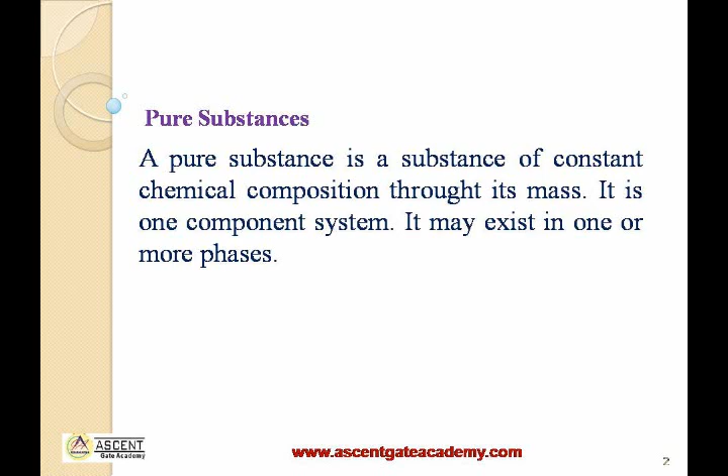Few definitions. Saturation state: a saturation state is a state from where a change of phase may occur without a change of pressure or temperature. Critical temperature: at critical temperature, a liquid completely changes to vapor and vice versa. And above critical temperature, a vapor cannot be liquefied by any amount of pressure. Critical pressure: at critical temperature, the minimum pressure required to transform a vapor to liquid is called critical pressure.

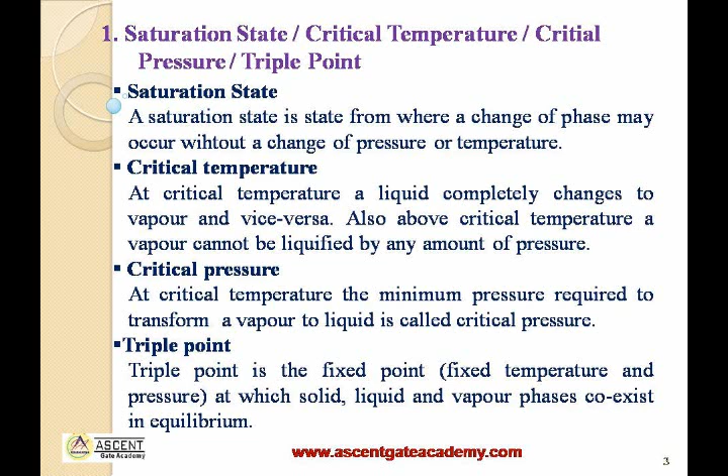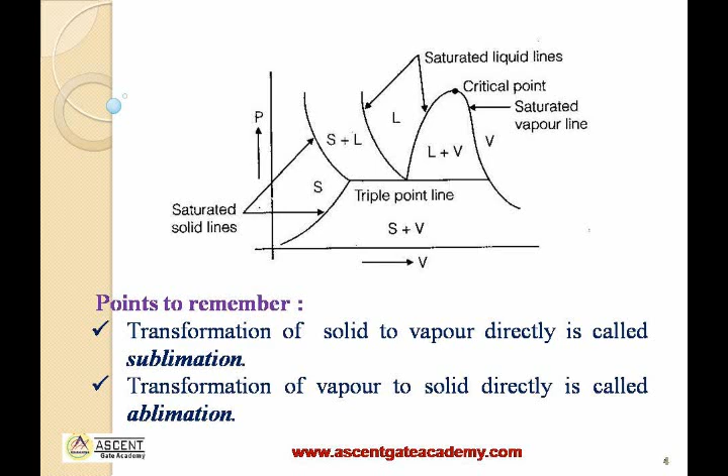Triple point: triple point is the fixed point, or fixed temperature and pressure, at which solid, liquid and vapor phases coexist in equilibrium. Few points to remember. Transformation of solid to vapor directly is called sublimation, and transformation of vapor to solid directly is called ablimation. Degree of subcooling: saturation temperature minus actual temperature. Degree of superheating: actual temperature minus saturation temperature.

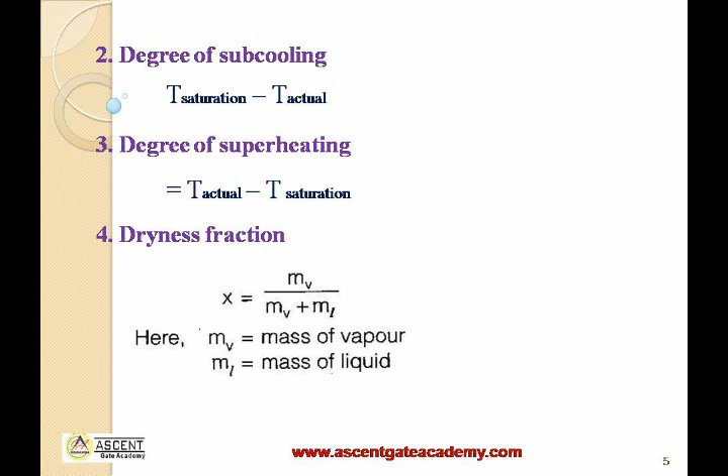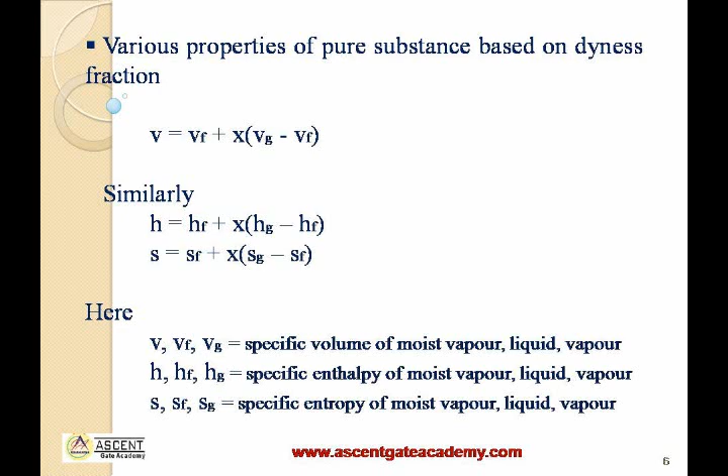Dryness fraction: it is the ratio of mass of vapor to total mass of mixture. X is equal to mv upon mv plus ml, where mv is mass of vapor and ml is mass of liquid. Various properties of pure substances based on dryness fraction. The volume of any wet steam V is equal to Vf plus X Vfg, where Vfg is Vg minus Vf. Similarly, H is equal to Hf plus X Hfg, S is equal to Sf plus X Sfg.

Enthalpy of liquid at various points. H is equal to Hf plus X Hfg. On vapor line, H1 is equal to Hg, which is equal to Hf plus latent heat Hfg. On superheated region, H1 is equal to Hg plus Cp (T1 minus T2), where T1 is temperature of superheated steam, T2 is saturation temperature, and Cp is specific heat of vapor.

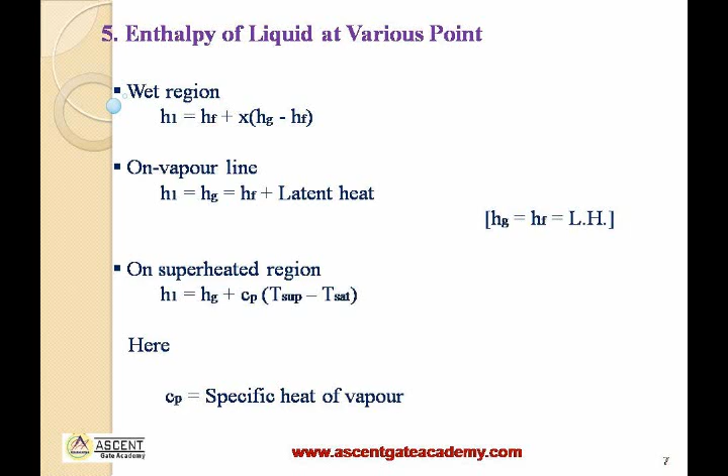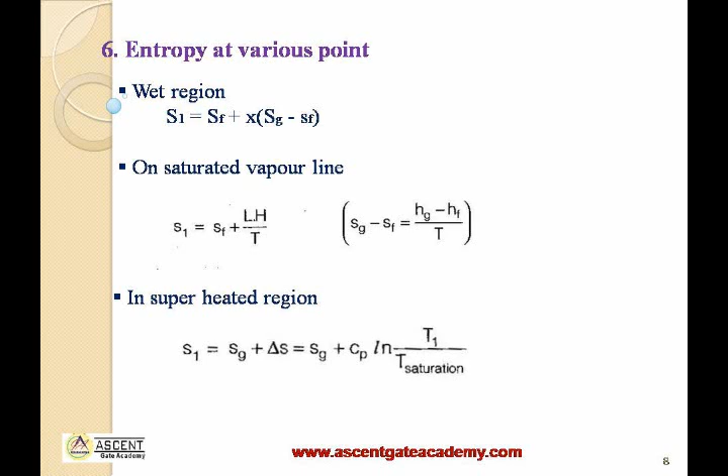Entropy at various points. At wet region, S1 is equal to Sf plus X Sfg. On saturated vapor line, S1 is equal to Sf plus latent heat upon T, or Hfg upon T. Latent heat is nothing but Hfg. In superheated region, S is equal to Sg plus Cp ln of T superheated by T saturation.

Few important points. A gas of pure substance requires two known properties to describe it completely, that is, it has 2 degrees of freedom. A liquid and vapor in equilibrium state or saturated state has 1 degree of freedom. A liquid, vapor and solid in equilibrium, that is at triple point, has 0 degrees of freedom.

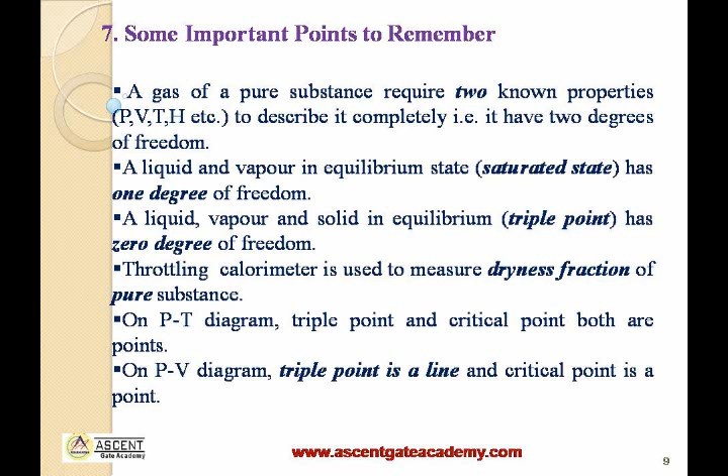Throttling calorimeter is used to measure dryness fraction of pure substance. On PT diagram, triple point and critical point both are points. On PV diagram, triple point is a line and critical point is a point.